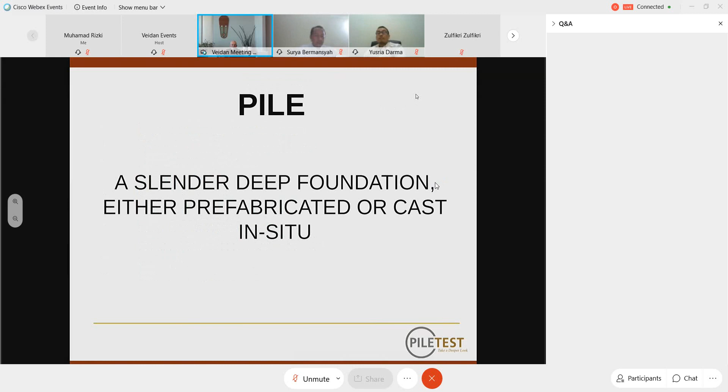A pile is a slender, deep foundation, either prefabricated or cast in situ. Piling are very old. Wooden piles have been discovered in London and dated to be more than 4,000 years BC, which means more than 6,000 years old. This is really old.

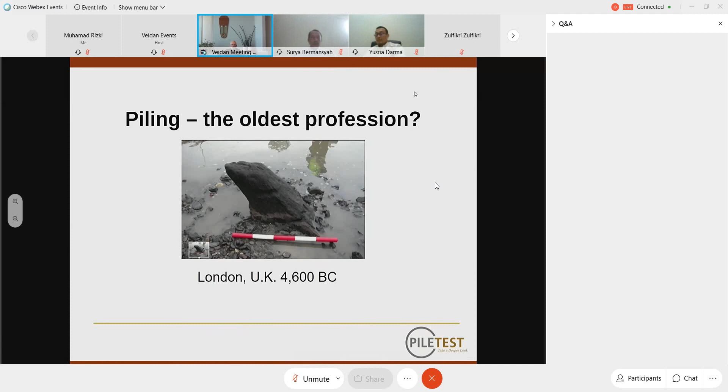Today, we have many kinds of deep foundations, piles of all kinds. Generally, we divide them into displacement piles and replacement piles. But there are many pile types, and contractors all the time develop new types of piles with sizes growing larger and load carrying capacity growing higher and higher. All piles have one thing in common: the final product is invisible. It looks like this in many cases.

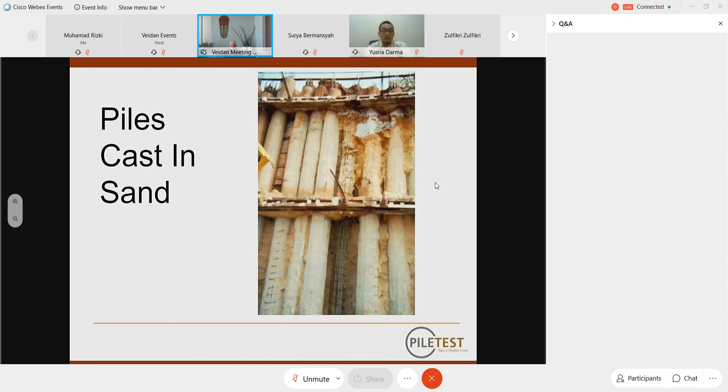Now we have to eliminate the guesswork and get as much information about the hidden part of the pile. And the hidden part is sometimes very bad looking, like this example - piles that have been exposed and do not show very good workmanship. Here the contractor was a little smarter and used casings made out of cardboard pipes, but you see that this was not enough. Still, there are defects in these piles.

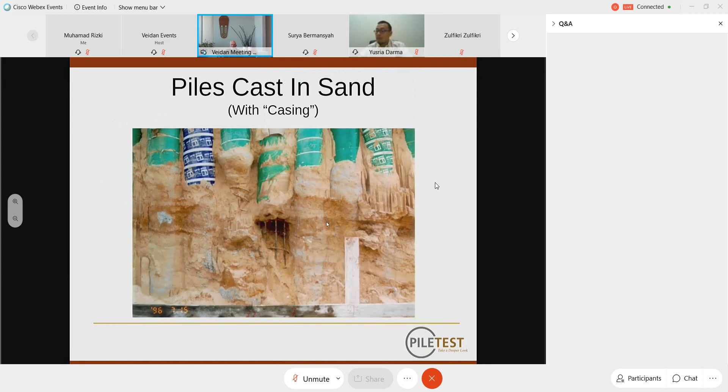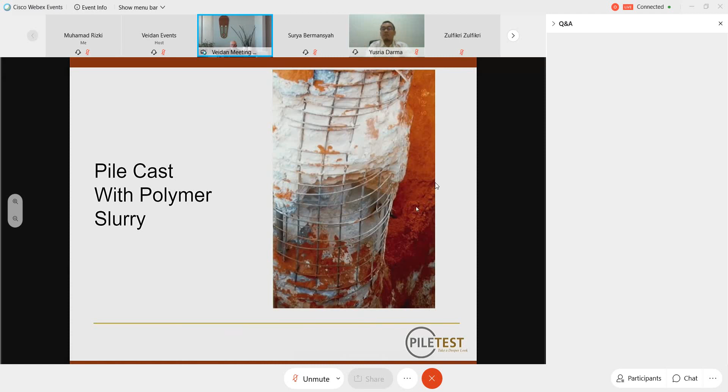This is a pile produced by a very good contractor, but unfortunately, unknown to the contractor, he hit a live sewage pipe, and this is the result - a poor pile. This pile was produced by a contractor who was not so good. He used polymer slurry, but probably not very successfully.

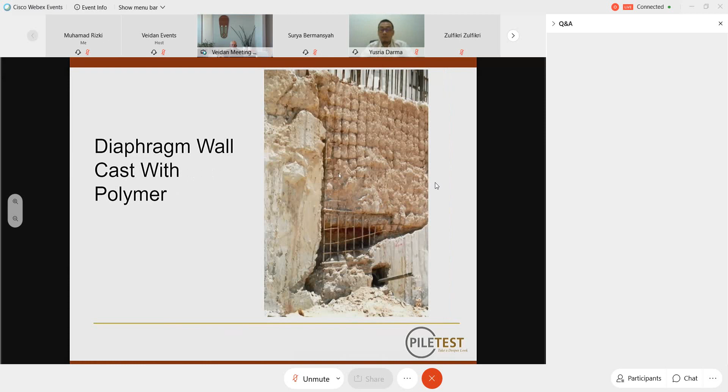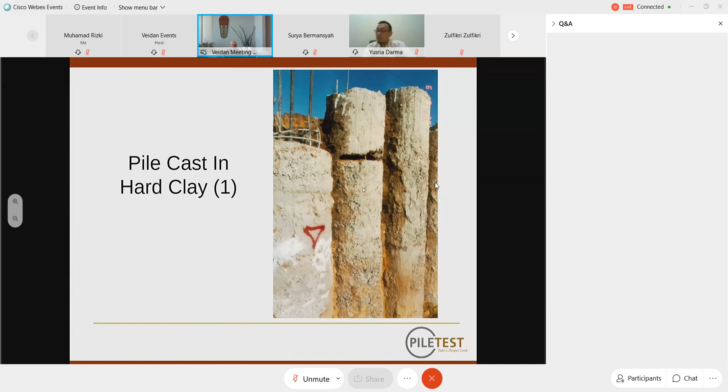Here is a pile cast under excellent conditions. Only when the contractor concreted the pile to this level, the concrete supply was finished. So he delayed the rest of the work to the next morning. During the night, there was some wind that blew some sand, and there was no contact between the two parts. Now the owner is very happy - he got 2 piles for the cost of 1.

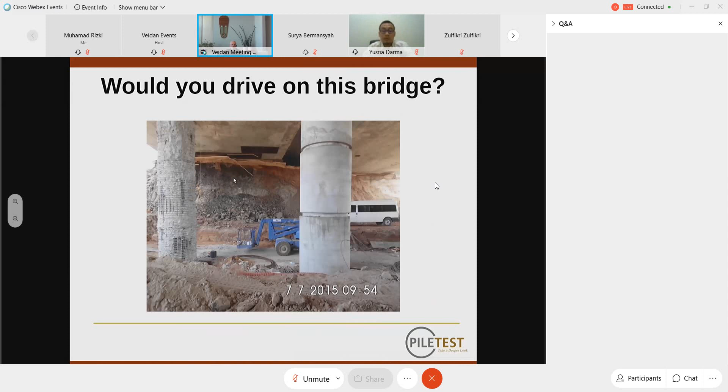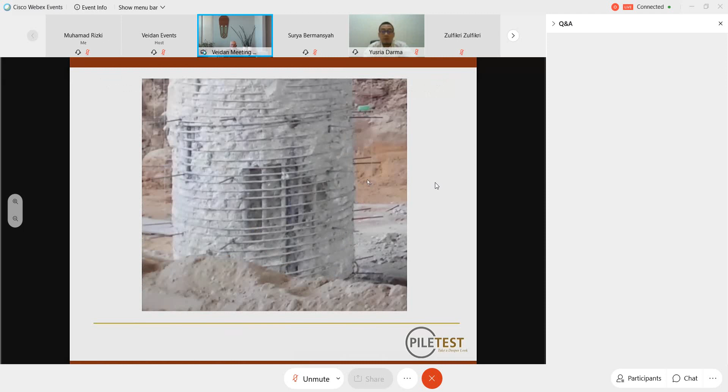How many piles can be defective? It depends on the method, on the time, and of course the most important question: who does the testing? The first figures we had in literature said that 1.7% of the piles had defects. But of course, at that time, about 40 years ago, the equipment was very poor and primitive, and tests were performed by the contractor who produced the piles. Of course, he was not very happy to report piles that were borderline cases.

Later on, in California, they used a lot of radioactive testing. They found that among almost 3,000 piles tested, 20% had flaws, 600 out of 3,000. That's quite a lot.

Visual inspection is even more severe, with values of 64 or 76% of piles with flaws. In Asia, visual inspection produced more than 20% flawed piles. In Italy, ultrasonic testing showed 12%. Israel showed 22%, 65%, 43%.

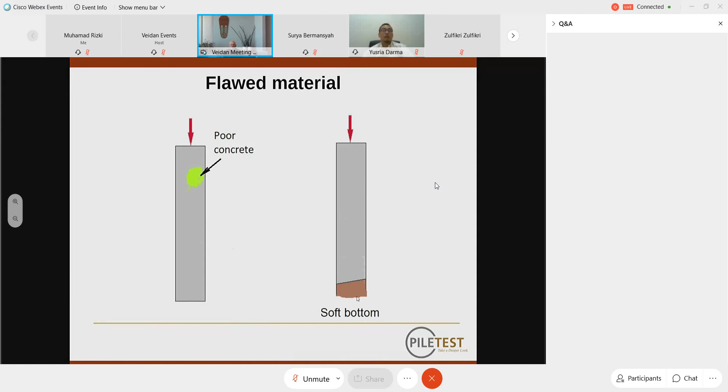Flaws can be in the material, like poor concrete not far from the top of the pile, or a soft bottom - concrete that is mixed with mud, drilling mud, bentonite, and so on. This is poor material. We can also have abnormal geometry, like a short pile.

A short pile can be caused by soil collapse, or because of greed of the contractor, who hopes that nobody will ever catch the fact that his piles were too short.

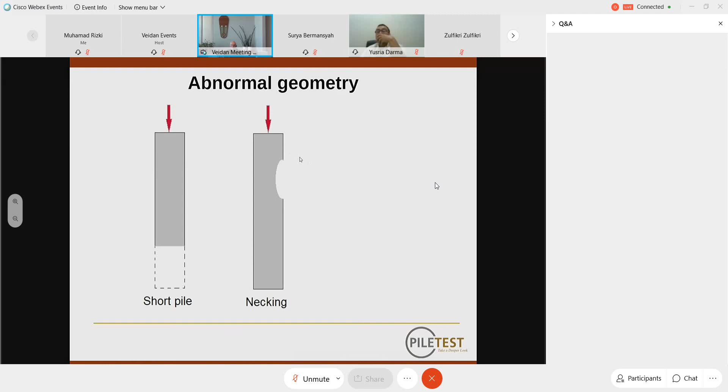Integrity testing techniques are used to discover defects before they can cause any damage.

In a famous case in Hong Kong, flawed piles were discovered only when the superstructure reached the 30th floor. By that time, the building started to settle so much that it had to be abandoned and torn down. So our ideal is to discover the defects before they can cause any damage.

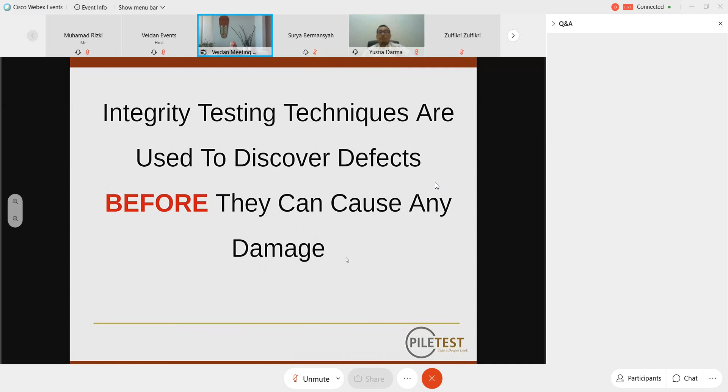We have two general methods of integrity testing. The first is direct methods, excavation. If you suspect that the top of the pile is of poor construction, you can just excavate around it. Of course, the depth is limited by the means you have, the excavator, and by groundwater.

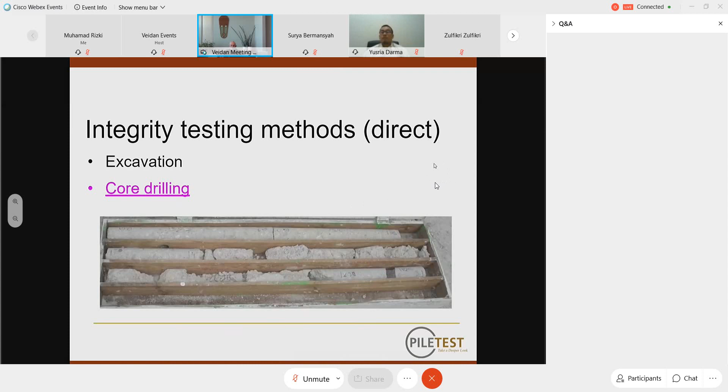The second method, which is almost unlimited by depth, is core drilling. We can core drill in the pile and see what kind of concrete we have inside. Core drilling can be performed to larger depths, but of course it will give you information only about a small percentage of the cross-section of the pile.

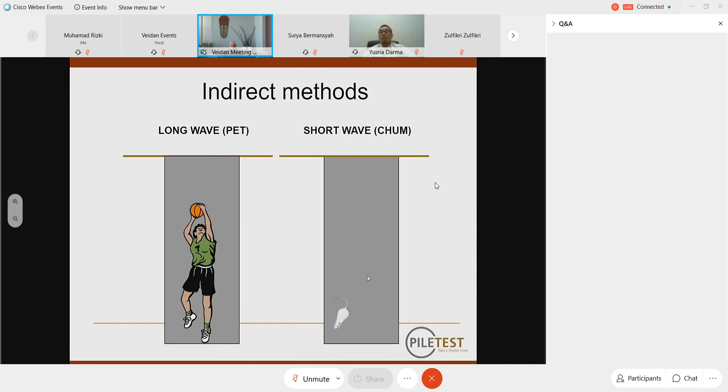Other methods are indirect. We can use long wave, like the PET instrument that I'm going to present to you soon, and short wave, like the CHUM. Long waves can travel in the pile only up and down, while short waves can travel up and down, sideways, and in all other directions. That's the difference between the two main testing methods.

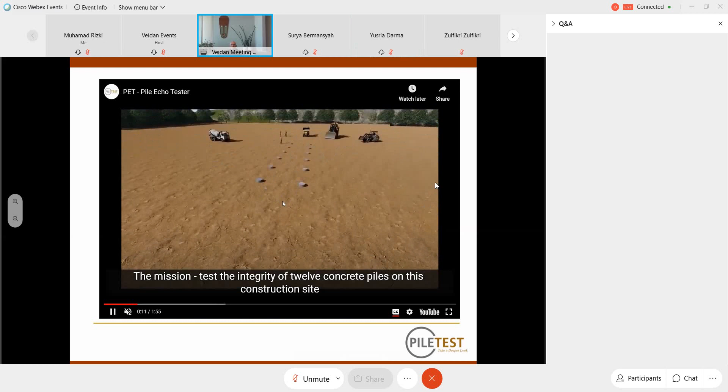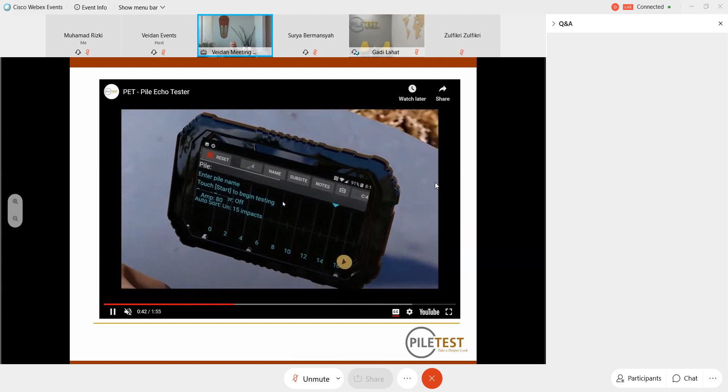Okay, here we have a pile that we have to test by the PET (low strain) wave method. Here's the sensor, we press it against the top of the pile, and we hit it lightly with a plastic hammer. We don't have to hit very hard. The wave produced by the hammer blow goes down all the way to the toe and then returns to the sensor. The result is shown on the screen.

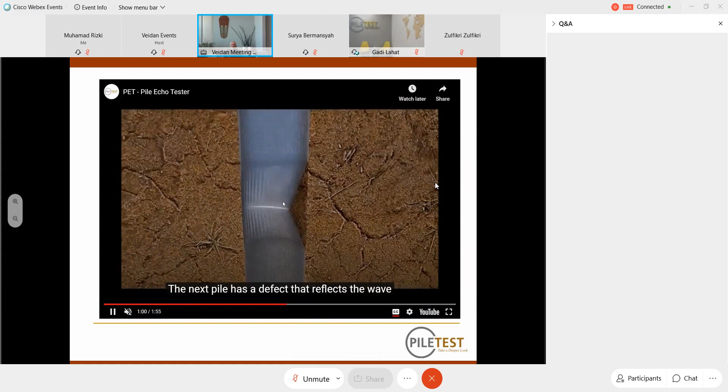Now imagine a pile that has a defect here. When the wave reaches the defect, it is reflected back and part of the wave goes down to the toe. On the screen, we can see not a straight line, but a line which goes down and then up, which means that we have a necking here.

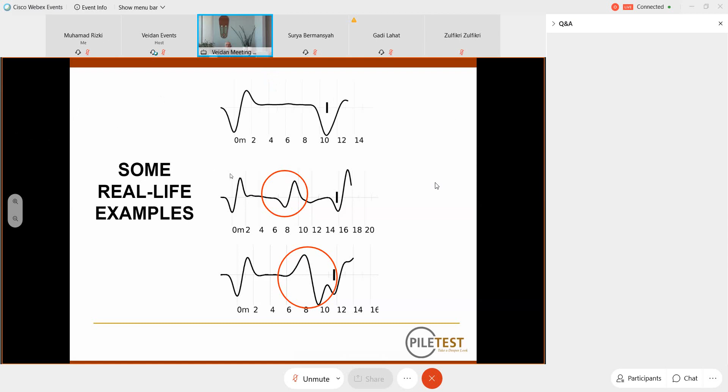Okay, here we see examples of three tests. The top one was performed on a good pile. The central one is a test on a pile that has a necking in the middle. And the bottom one is a pile that has a large bulge below the middle.

The PET has a utility for signal matching, and when you enter the shape of the graph you got from the system, you can, by iteration, find an approximate shape of the pile. You see that this is the pile that has a large bulge, and you see the graph, or what you call the reflectogram, showing the rise of the line.

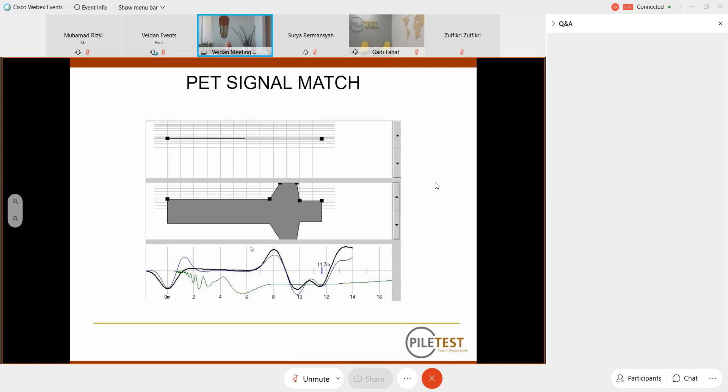The sonic method, or the PET, can find many things. First of all, the length of the pile, approximately, to within an accuracy of 5 to 10%.

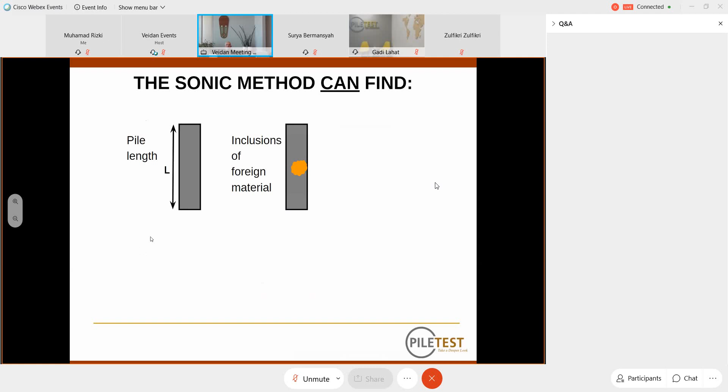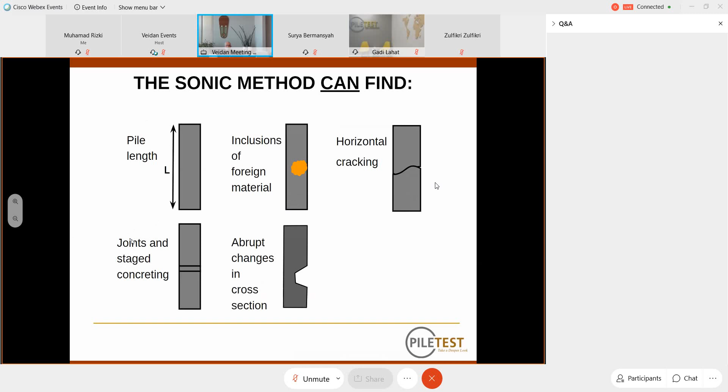We can find inclusions of foreign material, like mud, drilling mud, etc. Horizontal cracking. Joints and staged concreting with a break in the middle. Changes in the cross-section, abrupt changes, not gradual changes. And changes in soil layers.

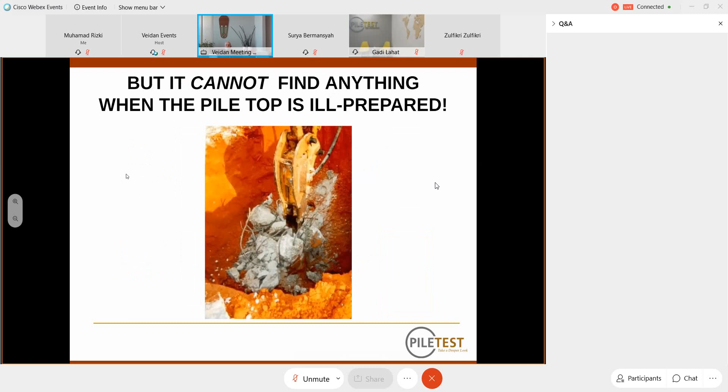Advantages are quick. The test is very quick. It's inexpensive. It's universal. It applies to concrete piles, wooden piles, some steel piles, etc. And there is no pre-selection. You don't have to make any special preparation except for cleaning the top.

The test effectiveness is limited by the slenderness ratio, not by the length, but by the ratio between the length and the diameter. A pile that has a very long or very large slenderness ratio is more difficult to test and get a toe reflection.

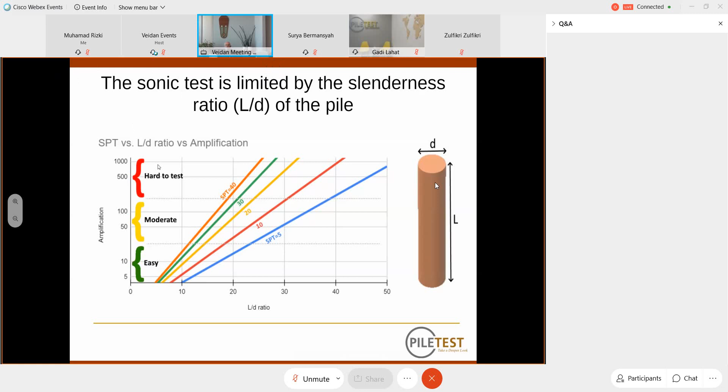The test duration, I said that the test is very short. Within 30 seconds, you can test 60% of the piles. Within 90 seconds, you can test about 90% of the piles. So the test is very quick, and therefore it is also very cheap, inexpensive, which means that you can afford testing all the piles on a given site.

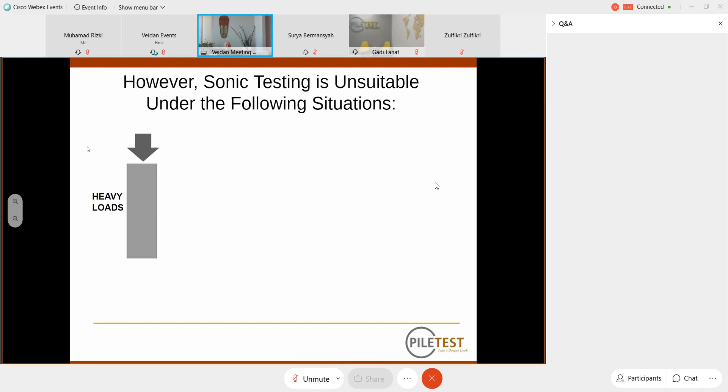Now, when is this test inapplicable, or when does it provide results that are not good enough? If we have a large pile with heavy loads, the test doesn't have enough resolution to satisfy our needs.

If the pile is not cast to the top level, or the ground level, sometimes if you plan to excavate a basement after casting the piles, in this case you cannot use the method because you cannot approach the top of the pile.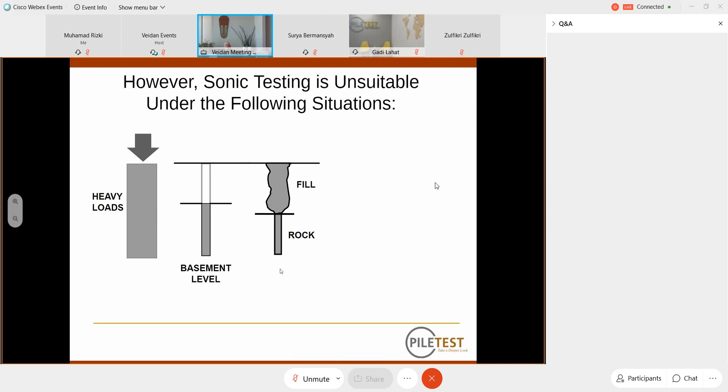If you have a pile in a mountainous, rocky terrain, and you drill in the rock, you have a very nice straight profile. But if you have rock fill above, the cavities in the fill are filled with concrete, and you have a very rough profile, which makes the testing impossible to analyze. And of course, if you have a wall, the method is good only for one-directional elements and not for walls.

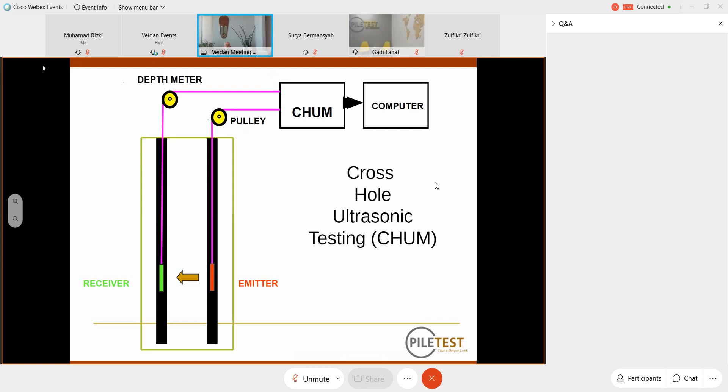In this case, we use the cross-hole ultrasonic testing method, or the CHUM. For the CHUM, we need a number of access tubes cast in the pile, at least 2. The instrument and the computer, two pulleys, cables with sensors, and when we pull both sensors to the top of the pile, they can discover all defects that are in between.

How is it done on site? On this site, we have 12 piles that we are going to test by the cross-hole testing. Here is the CHUM instrument and the computer, depth meter, and we put the two pulleys with depth meters on a pair of tubes.

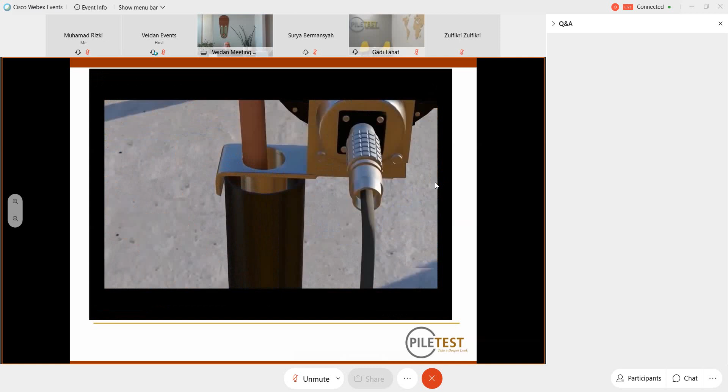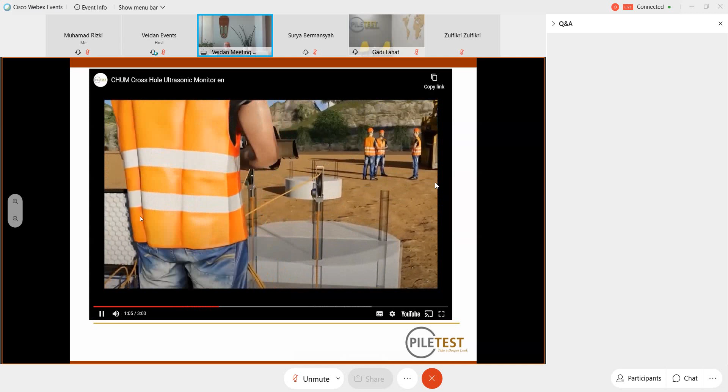The tester inserts the sensor into the tube, which is filled with water for good coupling. And the sensors are lowered all the way to the bottom of the pile. Once we reach the bottom, we make sure that both sensors are at the bottom and at the same level, and we start pulling when we get the order to pull.

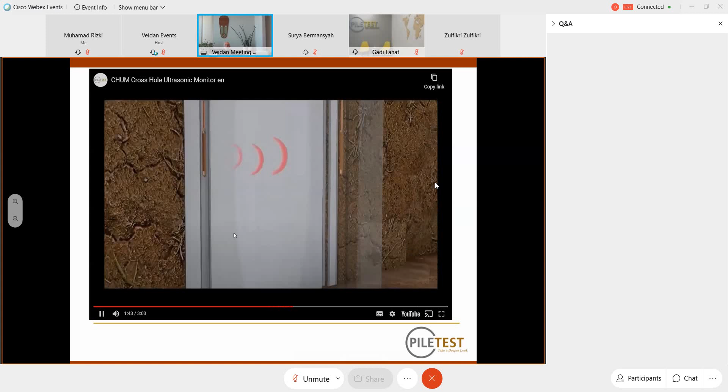The depth meter shows you exactly where the sensors are at any moment. And you can see on the right bottom the pulses as they arrive from the transmitter to the receiver. When you reach the top of the pile, you can see the results on your screen.

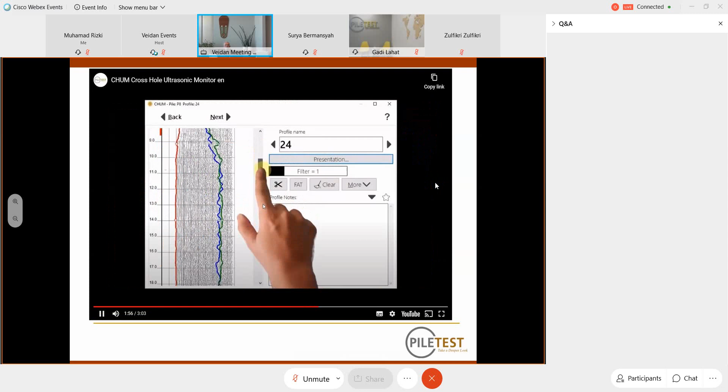The results include the time of the first arrival, the energy, and the wave speed between the tubes. The wave speed is connected to the compressive strength of the concrete. The higher the concrete strength, the higher the wave speed.

This is the CHUM method. It's very portable. One person can operate it on site. And it can reach depths of 100 meters and even more. The CHUM, as you see, can do also tomographical testing in 2 and 3 dimensions.

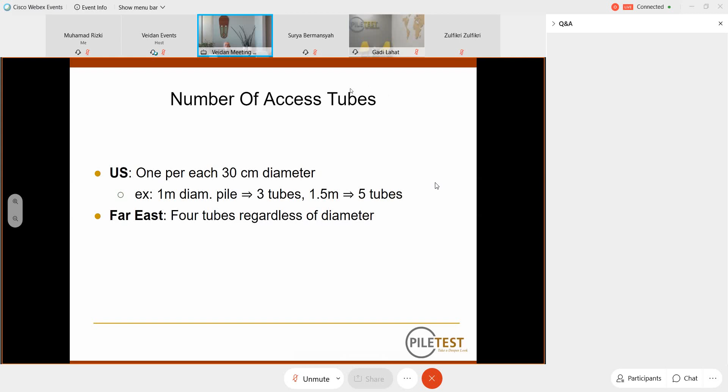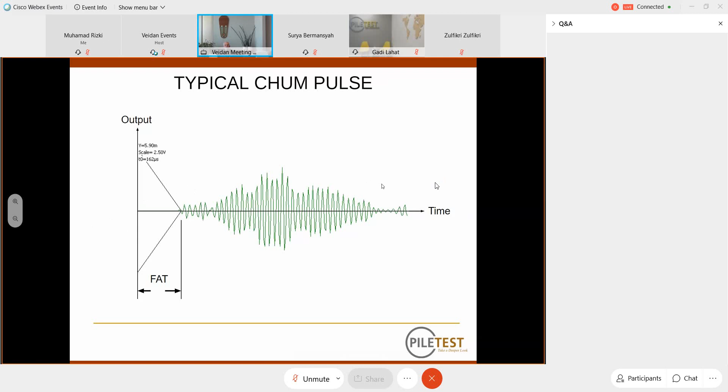As we said, the results include the FAT, first arrival time, very important, relative energy in decibels, apparent wave speed in meters per second, and of course the waterfall presentation.

On the left you see a typical graphic presentation of a pile that has quite a serious defect at this depth, at 3.5 meters. You see longer FAT travel time, lower energy, and the waterfall presentation that here is nice and healthy doesn't appear here. The gray becomes totally white.

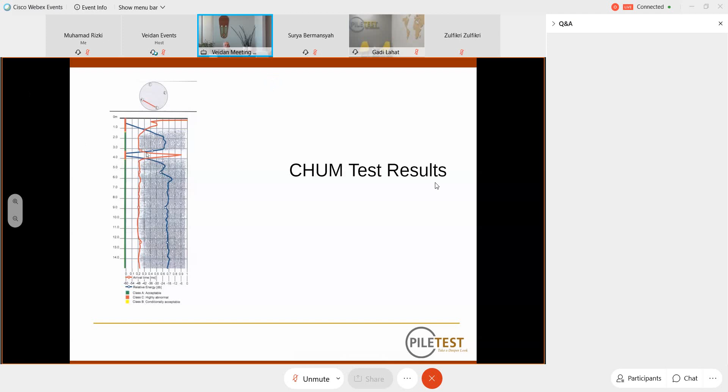As I said, the CHUM can also produce tomography, when we pull the sensors not at the same level but at diagonal directions. Here we must use two depth meters to let the system know where each of the sensors is located.

Here are the results. We have several methods to analyze the results, and here you can see not only at which depth the defect is, but also the horizontal extent of the defect. You see here that it's closer to the right-hand tube.

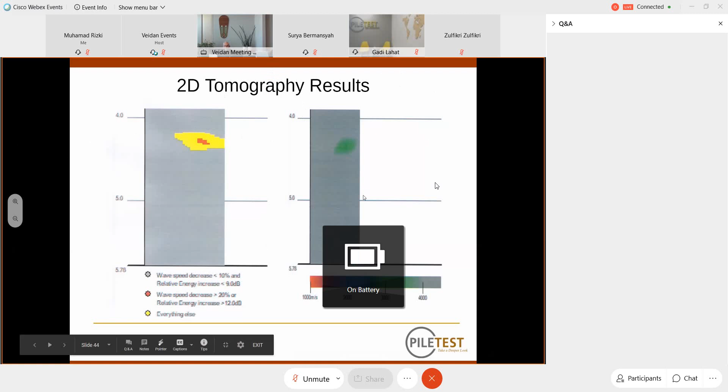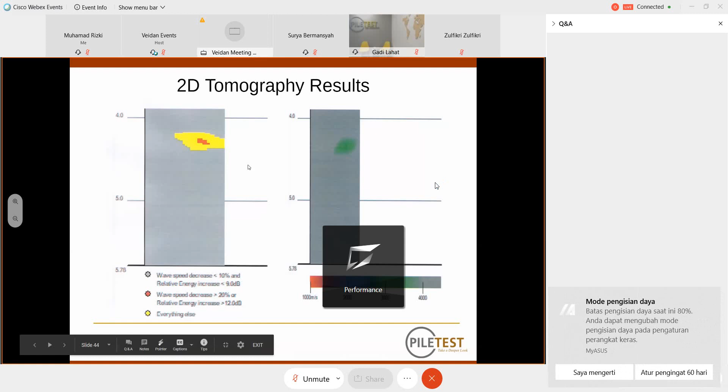Now let's put some order in the definitions of anomalies, flaws, and defects, because many engineers mix between these terms, and this misunderstanding can become very expensive.

An anomaly is any irregular feature in the non-destructive testing results. It can be due to a number of factors: the testing instrument, if it has a lot of internal noise you can have anomalies; the means used, if the tubes are not filled totally to the top with water it affects the results, or if you have plastic tubes that debond or separate from the concrete you can have an anomaly; the surrounding soil, as we saw in the PIT test how soil affects the results; and of course an anomaly can be caused by an actual flaw or defect.

So the first three factors have nothing to do with the pile itself. Number four does.

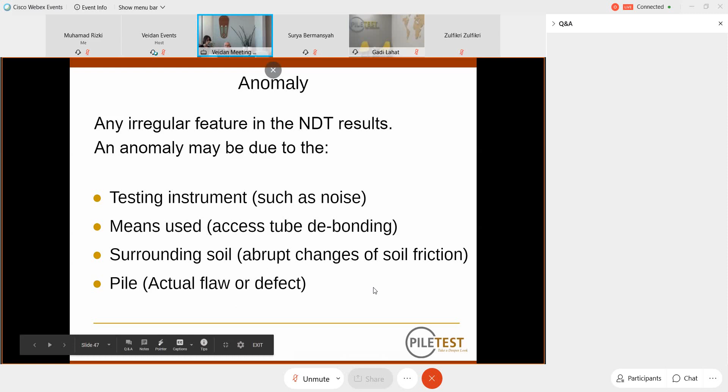A flaw is any deviation from the planned shape or composition of the pile which does not necessarily detract from the pile's performance. For instance, a bulge, a larger cross-section, normally doesn't cause any negative effects on the pile, but it's still a flaw. It is a deviation from the planned shape.

A defect is a flaw that, because of either size or location, may affect the pile's capacity or durability.

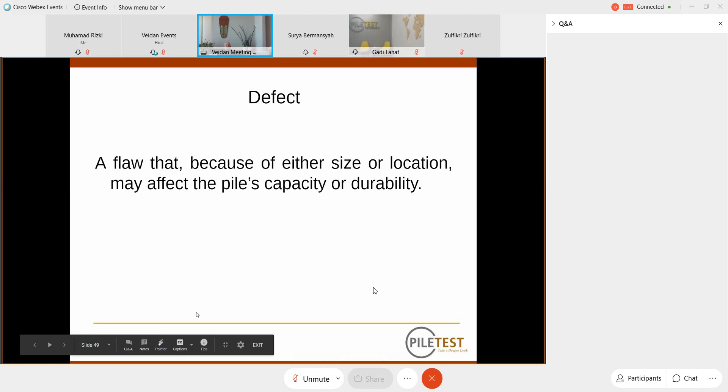Now, who is in charge of these definitions? The testing laboratory is responsible for reporting anomalies and assessing which anomaly comprises a flaw. So the testing laboratory is your eyes on site. They see what's going on and they can investigate and inquire with the site people if there were any events during the construction of any given pile.

If the testing laboratory determines that the anomaly is a flaw, it is brought up to the geotechnical engineer and the structural engineer, and they assess the results and determine which flaw comprises a defect.

Now, a pile with a defect doesn't mean that you have to throw it out immediately, of course, if you can. A pile with a defect can be repaired or can be left as is, depending on the situation. That's the reason why the two engineers together determine that the pile has a defect and what to do about it.

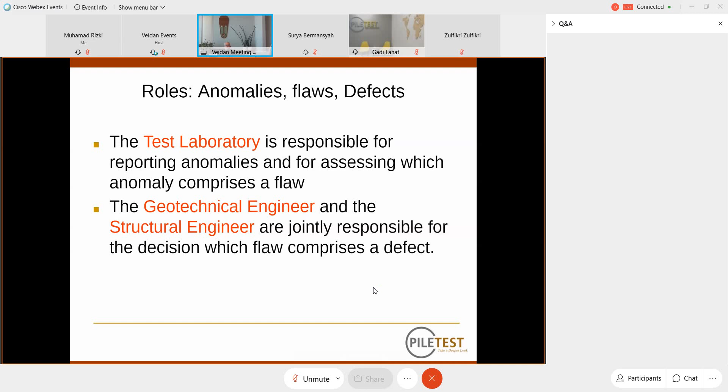Another subject: inclination testing, the BIT. Apparently all piling specifications demand that the deviation of the pile from the vertical will not exceed any given value. For instance, the Federal Highway Administration in America allows 20 millimeters per meter deviation from the vertical.

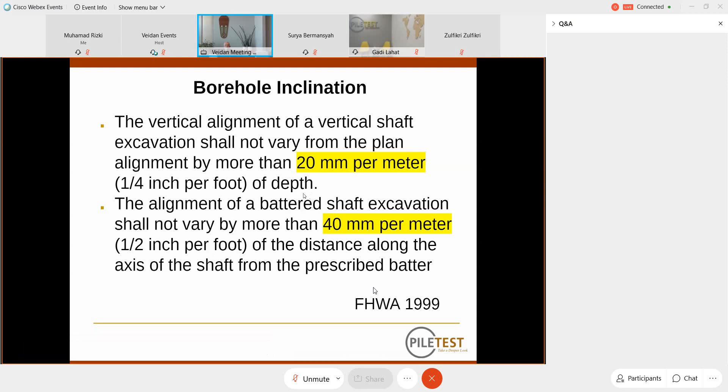The BIT, borehole inclination tester, is the tool for checking the verticality of piles. You can attach it to the top of the drilling bucket here. It is totally waterproof to a depth of 150 meters below the mud level, and it can determine, with the bucket used as a centralizer, the verticality of the pile.

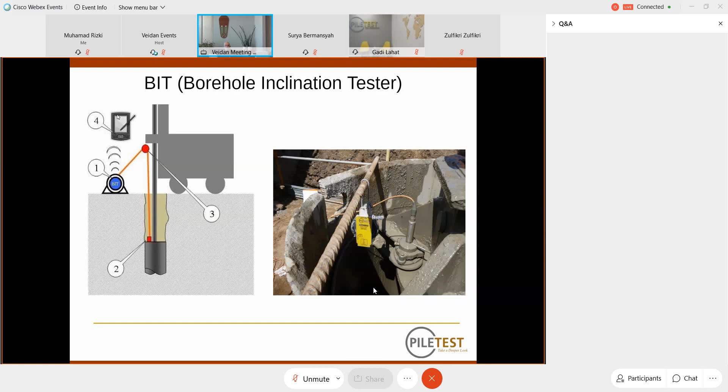Here you see the scheme. Number one is the instrument located inside the cable reel. Number two is the sensor located on the drilling bucket. Number three is the wireless depth meter. And number four is the data logger, that is normally just any Android smartphone.

How is the test made?

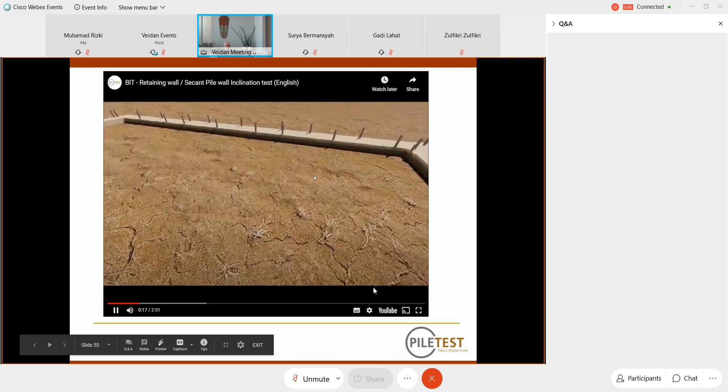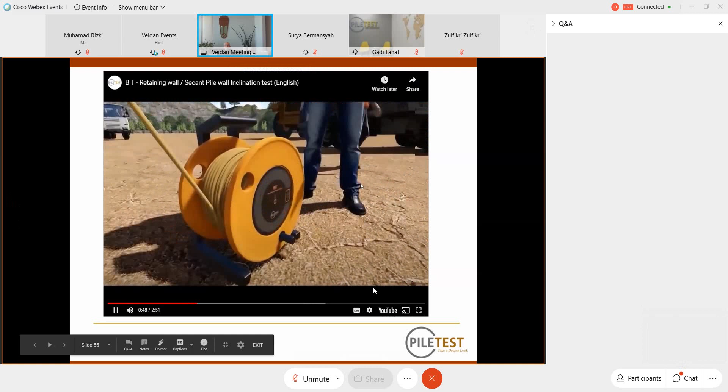In this case, we'll see how the instrument can be lowered inside the access tubes located in the pile for CHAMP testing. You don't need any special tubes, and unlike normal inclinometer tubes, they don't have to be special grooved plastic tubes. You can use normal 50 millimeter steel tubes. With these piles, we want to know the deviation. Here is our centralizer lowered into the 50 millimeter access tube. On top of the tube, you can see the depth meter. This is the cable reel with the instrument inside.

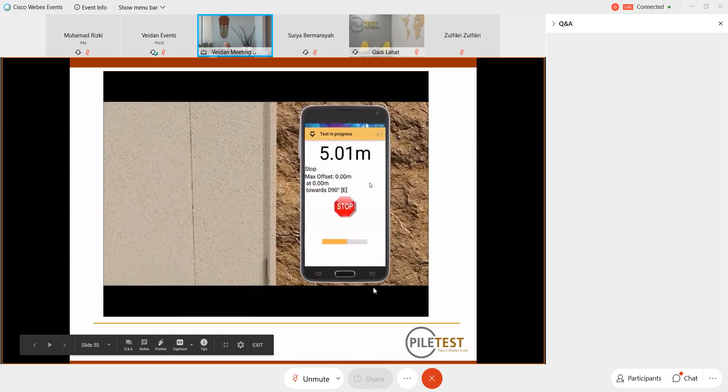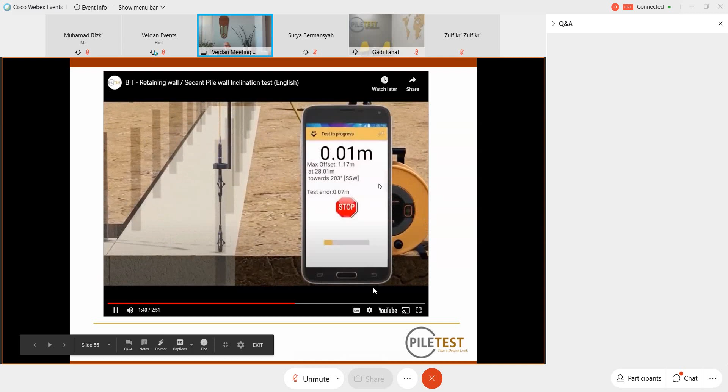It is connected by wireless to the depth meter and to the phone. We lower it in stages, making a stop every few meters for stabilization of the reading. When we reach the bottom, we pull it back and stop at the same stations. Once we reach back the top of the pile, we can see on the screen if we have any test error. We can see the profile of the pile in any direction, and if it deviates from the allowable deviation, we can see immediately.

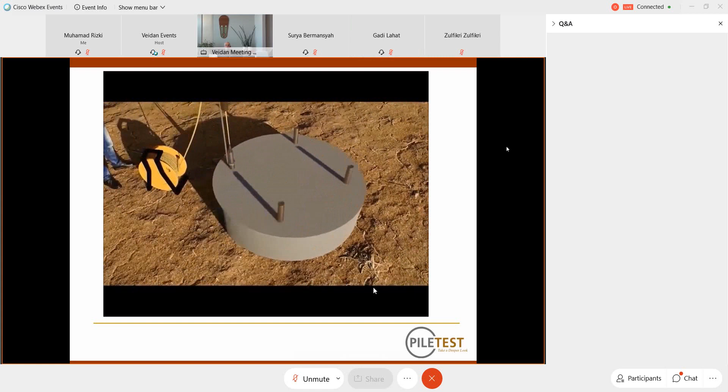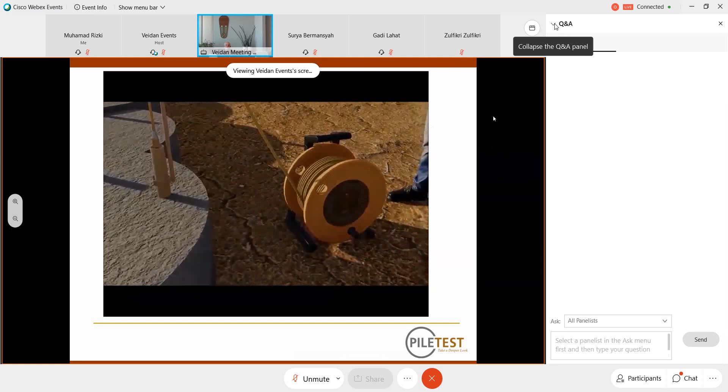This test can be repeated for all tubes, and the average produces the pile deviation from the vertical. This is a secant pile wall with the piles cutting into each other, where the inclination is much more important than in foundation piles. The same bit can be used also for geophysical testing, where the inclination is important.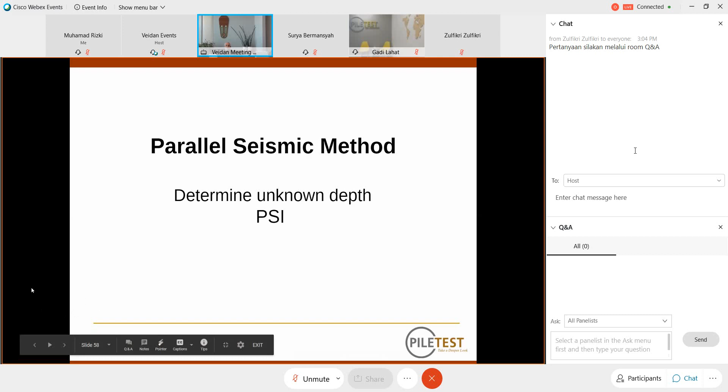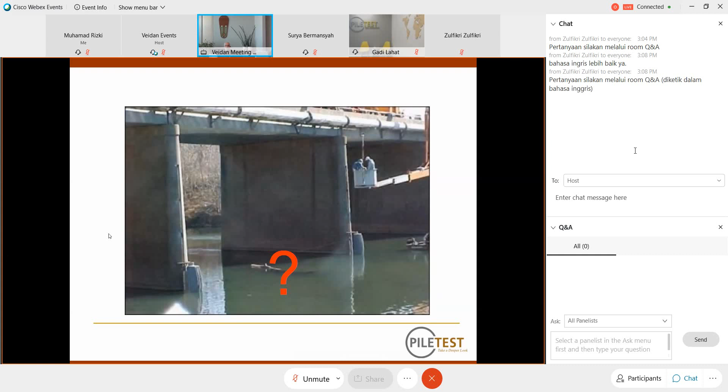Now, to the last testing method, where we want to test unknown depths of piles: the parallel seismic method. If we have to check the foundations of a very old building where we don't have any record, and we must know the exact depths of the foundations, for instance if we have to excavate under or near the building, we use the PSI, parallel seismic method. Here is an example: we have an old bridge with foundations, of course, and we don't know anything about the depths of the foundation. This is our instrument. It has several components.

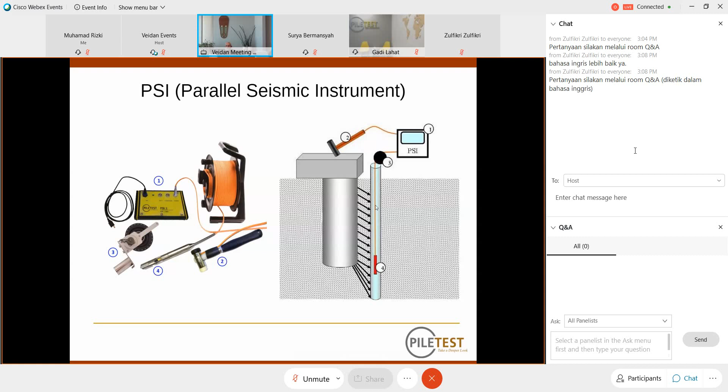If we hit the top of the structure and we don't know what kind of foundation we have, the waves we produce with the hammer blow go down into the foundation and sideways to the access tube that we drill close to the foundation. The hydrophone is lowered by stages in the tube, and all the time we keep hitting. And this is the result. On the left is the depth scale, and on the right hand, the time of the first arrival. We see that up to a depth of about 18 meters, the first arrival lines form a straight line, and below that we see a break, because in the upper part the wave goes through the pile, in this case a concrete pile, with a higher speed, and in the lower part the waves continue to travel from the pile into the ground where the wave speed is much lower.

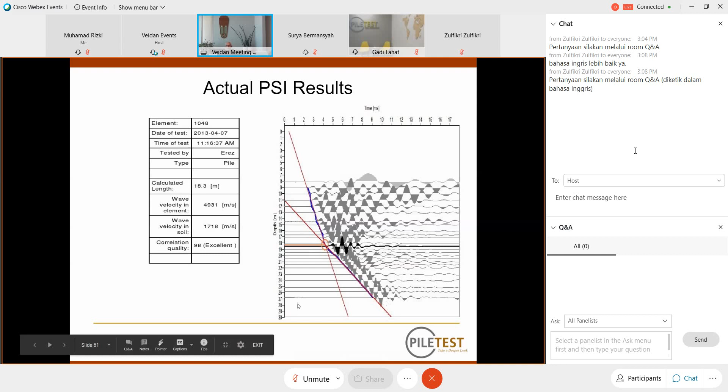Conclusions. I hope that by now you will agree with me that in piles, defects may be and therefore will occur. Innovation in piling is usually accompanied by an increased defect rate. It takes time for contractors to master a new construction method, and of course for engineers to write the correct specifications. Integrity testing techniques are used to discover defects before they can cause any damage - the word 'before' is accented here, because after they cause the damage, it's a little too late. Current integrity testing techniques can discover most important defects - and I accented the words 'most', not all, and 'important'. There may be some defects that are important and we cannot discover them because they are out of the range of the system. It is very important to know the capabilities and limitations of the method we are using, and it's very important to test all the piles.

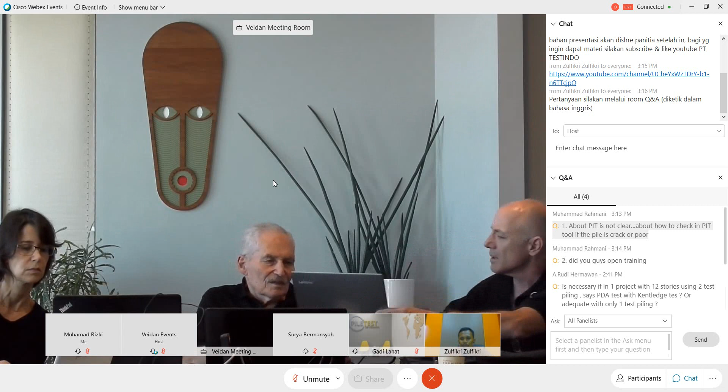Question by Rahman Yusuf: how many piles should be tested on a project? Are there any standard conditions? As I said before, it depends on the specifications. But since the PIT, or low strain impact testing, is so quick and so inexpensive, I always recommend testing all the piles.

Can you test the correctness of the tool on the pile? First use it on the column to test for cracks - a question by Muhammad Rahmani.

Well, you can test the tool on a column. You can test it on a beam. Sometimes you have precast beams lying on the ground - you can test them, and calibrate your equipment accordingly.